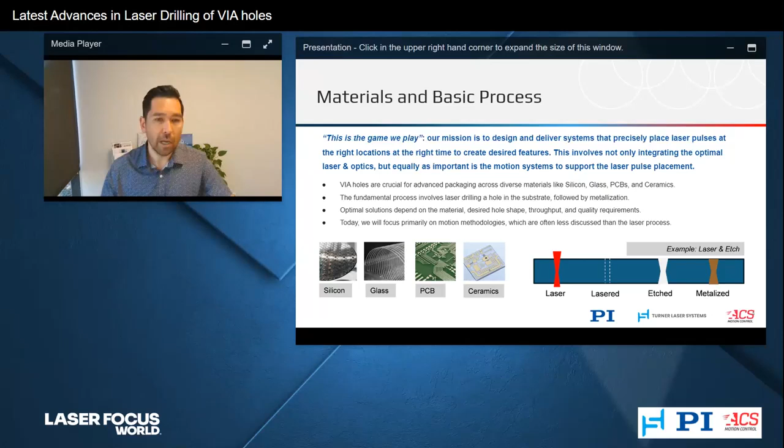I'm assuming a lot of people in this audience work with via holes and packaging in a variety of different industries, but essentially they're a central component to advanced packaging across a diverse range of materials and applications. We typically work with silicon, glass, PCBs, and ceramics. Fundamentally, it involves drilling holes in your substrates, followed by a metallization step, and there's a whole variety of different processes to achieve the hole drilling.

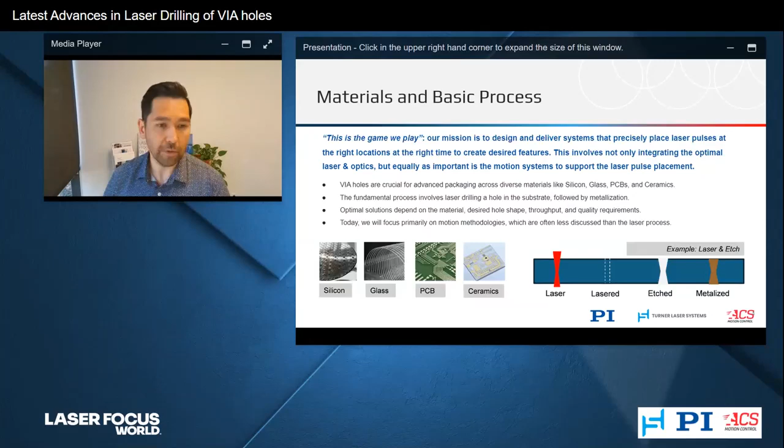We won't go through an entire presentation on laser processes, but as an example, on the bottom right is a laser and etch application in glass, which is commonly used, particularly in the semiconductor industry, and is generating a lot of interest. When I say laser and etch, I mean processing the material with a laser to create modified lasered features, followed by an etching step and a metallization to create the electrical interconnect. What is optimal really depends on the material you're working with, the desired hole shape, the hole size, the throughput you're looking to achieve, and the quality requirements. But today we're focusing primarily on the motion methodologies, which, compared to some laser processes often discussed in the laser industry, are a little less talked about. Hopefully this provides useful context if you're working with via holes.

Something right from the start I wanted to talk about, because it has a major impact on how you approach motion, is whether you're going to be running your processes with a galvo scanner, a galvo-based process, or a fixed optic.

A galvo scanner or galvo-based process is where we utilize a galvo scanner to direct the laser beam onto the workpiece. What we mean by this is the laser is scanning or moving over the workpiece while the workpiece is generally stationary. We'll talk about some more advanced methods a little later.

The pros of using galvo-based processes is you can have high throughput with these processes, in the sense that you can move very quickly from hole to hole. High jump time is meant to say high throughput jump time. But it's also a process enabler.

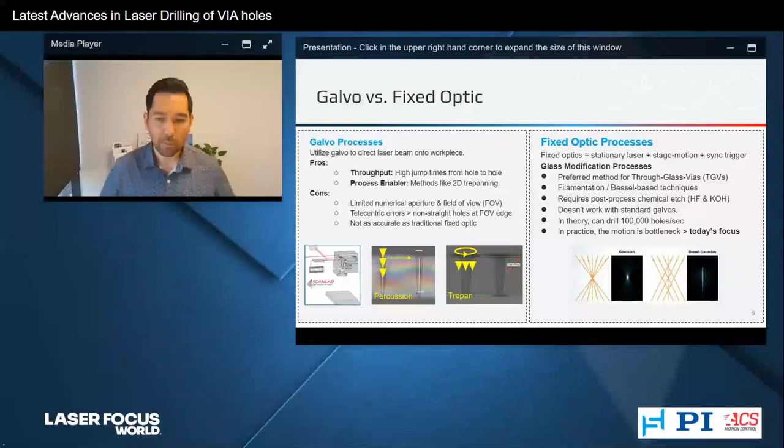Whilst in theory you can drill 100,000 holes per second, in practice the motion system is the bottleneck. That's going to be the core focus of our talk today, because there's a lot of promise with this technology, but the motion system needs a lot of work to enable it.

Some of the key requirements in terms of form factors: we work with wafers, we work with large panels, and we work with a variety of substrates of different sizes and thicknesses, ranging from 100 micron to millimeter typically. Taper angles of sort of a degree to 5 degrees is sort of common.

You can get close to zero taper if using the laser and etch method, or if you're doing ablation, you could use a 5-axis trepanning system. People sometimes use double-sided drilling for reduced taper, but that adds a lot of complexity to the motion and alignment.

From an accuracy standpoint, generally for the smaller holes, we're seeing about 2 to 5 micron accuracy requirement. Once you get to larger holes, 100 micron or so, you can probably live with something in the range of about 10 micron most of the time.

From a throughput standpoint, we generally see for applications in semiconductor where you've got large panels with millions of holes, the target there is to achieve thousands of holes per second, which can be very challenging.

And for other applications where you have fewer holes, you could usually have a much lower throughput.

In terms of laser and etch methods, generally there are two ways to approach this. You can have a single pulse per hole. It's the highest throughput—your motion is essentially focused on jumping between hole to hole. A single pulse creates that modification, but you have to aggressively etch, and it reduces the wafer thickness quite a lot.

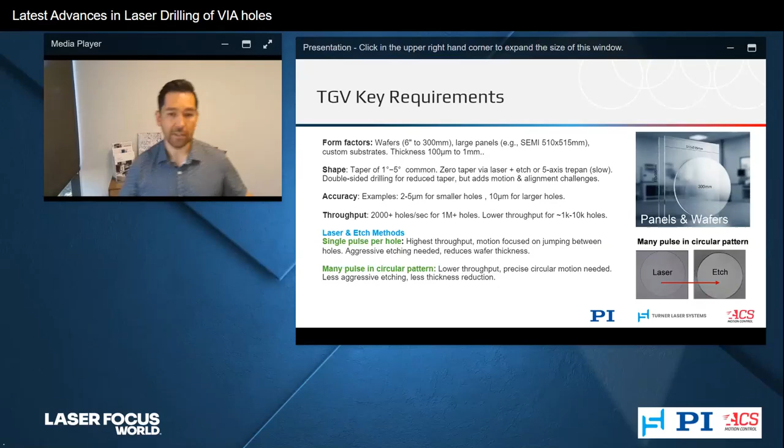Another method, which we'll be presenting today—just because it makes the motion a bit more interesting to present and provides some more education—is where you use many pulses to create the circular pattern. While this leads to lower throughput, because now you need many more pulses to create the hole, and it puts more demand on the circular motion, it does mean the aggressive etching can be reduced significantly, and you'll have less thickness reduction of the glass material.

Some other core challenges: the hole shape is important. We need to get good plating and electrical performance. We need very high uniformity from hole to hole—it's going to be important for yield.

As I mentioned, motion is the bottleneck for these ultra-fast laser-based processes. Acceleration and jerk are absolutely critical. A lot of times people talk about speed, but really it's acceleration and jerk that's going to be driving your throughput in these applications.

And if you're working with panels and larger workpieces, you've now got additional challenges of the inertia of such a system, as well as achieving high accuracy. You need to think about both the static accuracy as well as dynamic positioning errors, which we'll be showing and presenting in a bit.

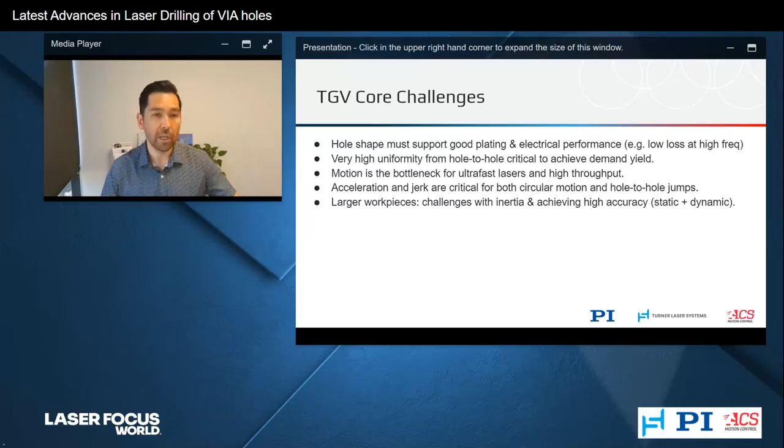Finally, just summarizing the application we'll be presenting a little later in this presentation: we're going to be doing 200 micron hole drilling in glass, and we've chosen a pitch of 2 millimeters. It's a uniform pitch—we chose this diameter and pitch just to make a really simple baseline, and our goal is to show you what it looks like as you use different algorithms or different stage setups.

So this is pretty simple. The lessons we're sharing here will apply to smaller or non-uniform pitches or hole diameters as well. Here we're using a femtosecond laser with Bessel optics, and these will result in very clean, straight, and damage-free holes.

Relevant if you're working in these industries: semi, medical device, telecom, defense, microfluidics. The motion challenges here are if you have incorrect hardware controls or synchronization, you get major issues with precision, yield, and throughput. As a little sneak preview here, I'll pass off to my colleague Matt to speak to the stage architectures.

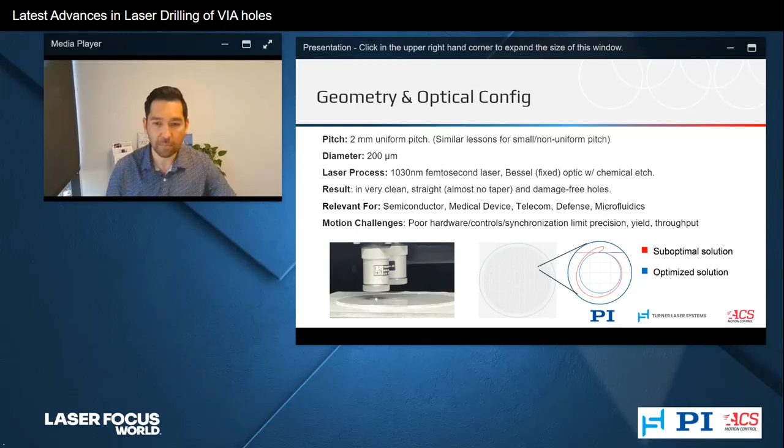Thank you, Mark. Mark has touched on a lot of key themes that we consider here at PI, especially in development of ultra-fast laser-based motion systems. So what I'd like to talk about specifically here is what Mark has been doing related to process. Specifically in terms of motion, I want to present on the stage architecture he's using, what we consider generally in mechanics and motion subassemblies that go into these kinds of advanced laser processing tools that Mark is manufacturing through Turner Laser Systems. I want to speak to our general philosophy and the work we do related to those.

So let me jump right into what we're calling stage architecture. There are some key characteristics that touch on those core concepts of ultra-fast processes and specifically what we do for those. I'm going to be presenting here on a V417 series of linear motor stages. As Mark mentioned, we need high dynamics, high dynamic responsiveness, and these systems and stages tend to be linear motor systems for those reasons.

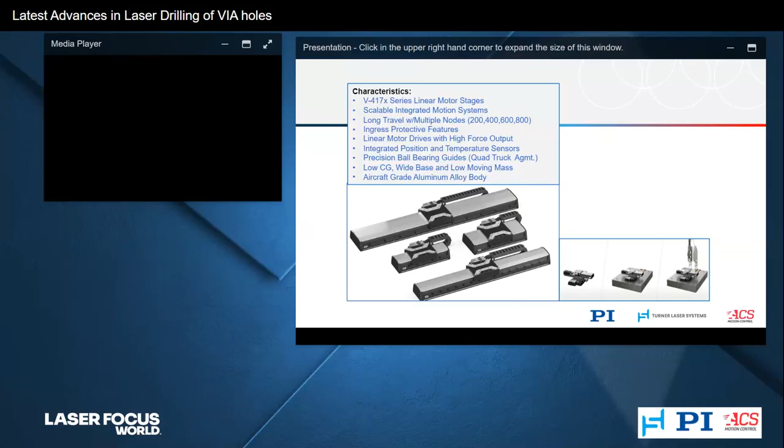So when we step through that, PI generally makes motion sub-assemblies, and this is part of an IMAS system series where we can provide scaled solutions, from an integrated XY base component stage with cable management for chucks and other things with service lines, to standard granite platforms, standard granite platforms with bridges, or out-of-crate complete motion sub-assemblies specific to the process.

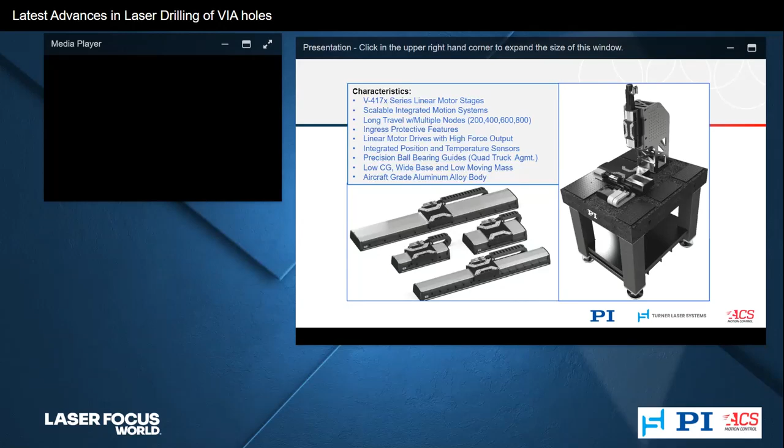And again, I'd like to point out that we are involved in a number of laser materials and additive manufacturing processes. This is one such system, but we have a number of architectures that we use. This one is specific to Mark's particular process that you're seeing here.

So as we step through, I want to talk a bit more about these dynamic characteristics, especially related to acceleration, jerk, and snap, the higher order time derivative of jerk. Generally, we want smooth, accurate dynamics without variable force as we guide. For that, we tend to lean into center drive linear motor kind of architectures.

That's what you're seeing in the V417 series and other such cases where you're dealing with femtosecond or picosecond kind of laser processes. So when we want that precise trajectory following that you'll be seeing in Mark's presentation and what Jason will speak to, we want a stiff, rigid, high dynamic structure that follows tight corners, much like we often hear in car analogies.

It's quite similar here. So we also want direct position measurement at the moving platform. In the language of what we do on the motion subsystems, we use linear encoders with the feedback topology specifically on the load, so there's no intermediate mechanical couplings that might otherwise introduce errors in position reporting. This is the architecture for these ultra-fast ablative or non-ablative processes.

And what we generally go to provide the best kind of results in terms of process that get validated at partners like Turner Laser Systems. So what does that look like practically?

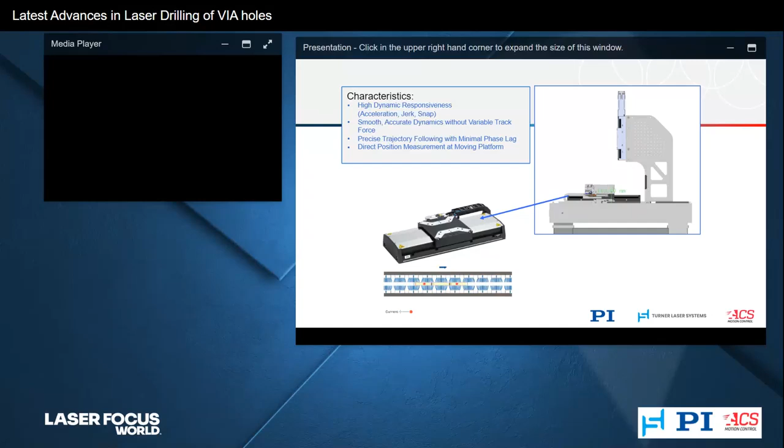We use ironless center drive, ironless linear motors. And what does that mean in terms of the way we design and architect these systems? Well, it's important to mention there are two critical factors to this, along with rigidity. One is the peak force output of the direct drive integrated motor. And so that motor in this case is a 3-phase ironless linear motor with a peak force output of 300 newtons. And we like to keep the moving mass low, but stiff. And so in this case, the V417 series has 2.8 kilograms of moving mass.

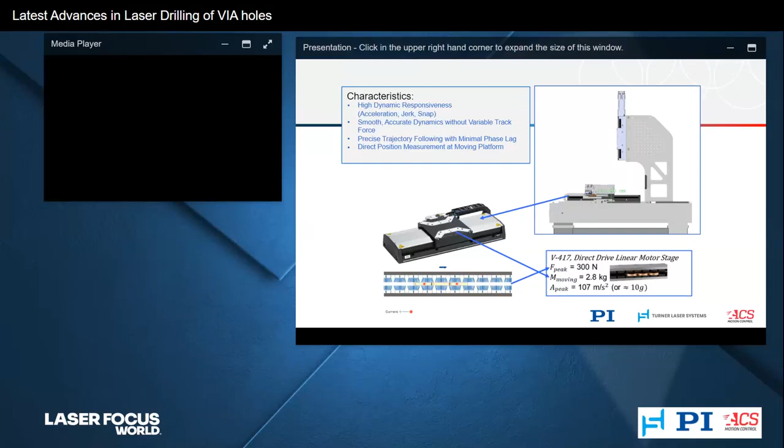So we also have to consider, though, that these stages get put into assemblies. And this is the case here in the process that Mark has been describing with the VIA hole drilling. And we have to consider that carefully also in the design of the motion architecture and expected architectures based on the component level stage assemblies.

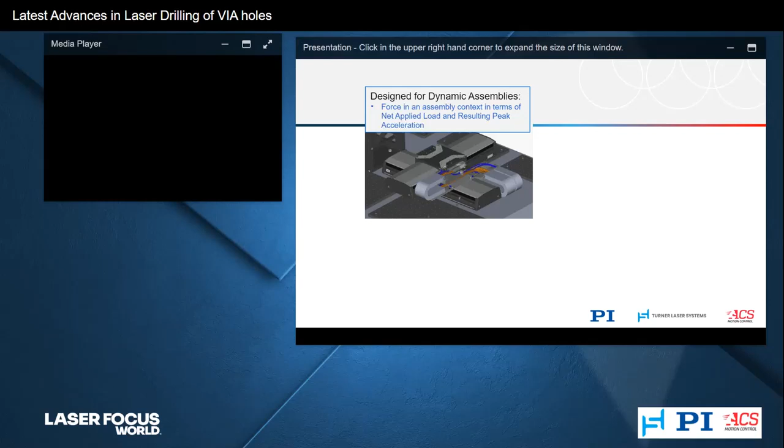And so when we look at that, we look at force in the assembly context, and what does that mean in net applied load and the resulting peak acceleration. So if we look at that, we have a mass buildup, is the way that I would describe it. And in motion, we often go to a moving mass description. In some cases, there's non-moving masses and they're not relevant for the application of motor force.

So in terms of this, you can see we have a carriage mass as a part of the V417 series. We have an upper axis mass that the lower axis is carrying on that carriage. And then we have an applied payload. It's not so uncommon that we carry aluminum chucks or other kind of substrates carried on vacuum chucks or holders of aluminum construction. Typically in ultra-fast laser processes, the substrates aren't terribly heavy. So in this case, let's presume kind of a typical load of 5 kilograms, chucking, applied load, etc.

And we calculate that force, and you can see that the peak force in terms of the stage is still 300 newtons on the lower axis, and with the full assembly weight, we can still move about 2 G acceleration in this kind of scenario.

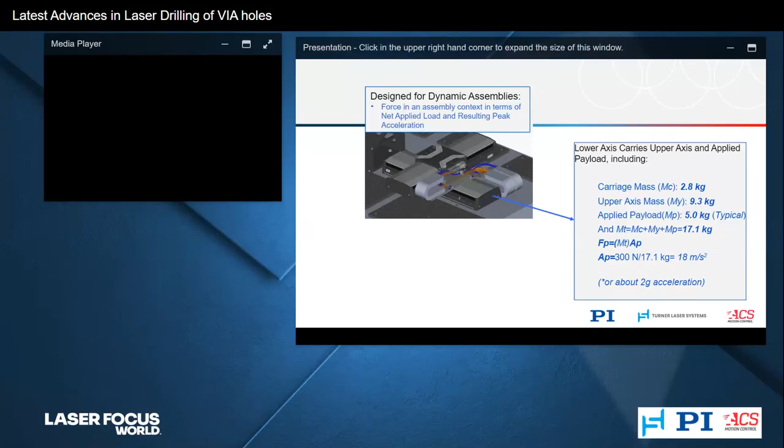So this is kind of to the point of purpose-driven design, that we want something that's wide, low base, low CG, low profile, but also stiff and lightweight. So when you make assemblies, you don't suffer inertial effects when you're trying to run tight corners. So this is all on the thoughtful design of the way that this works. And the center drive does that as well, where your center drive doesn't introduce torque moments or lateral kind of moments that, again, produce negative effects in terms of path following.

So now to step finally into another aspect, or the secondary aspect that's core to the design of laser materials processing stages and motion systems, we consider ingress protection. And most of these ablative processes are debris generating processes otherwise. You want to be careful to make sure that you have a sealed construction stage.

You want hard covers and side seals. You want passive ingress protection through the side seals, and you want, in our case, active ingress protection with an air purging system. So this generally, the air purging system provides two benefits. It provides the benefit of you prevent debris ingress into the interior body of the stage that could be contaminating or otherwise lifetime limiting. And secondary, with an air purge, you have constant airflow so you can prevent heat buildup.

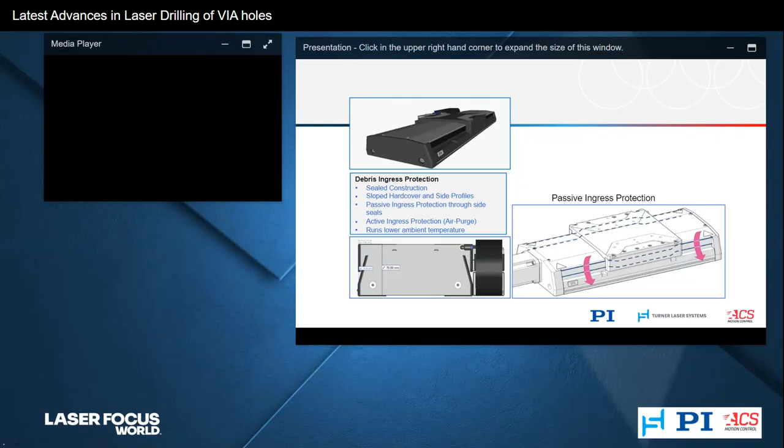And the slope construction keeps it channeled away from the body of the stage. And then we have active ingress protection. You can see these blue lines showing the airflow being tunneled with a positive pressure air purge into the interior body of the stage and out to the external environment, so you don't allow debris to contaminate the stage internals.

So when we look at these motion system subassemblies with these features that I described, that you're seeing the process results from, they all get backed against high performance motion controls and drives. That's a very important aspect to a successful process, along with the motion subassembly, stage architecture, and component level design details. And so to speak to that, I'll be passing to my colleague, Jason Gorgas.

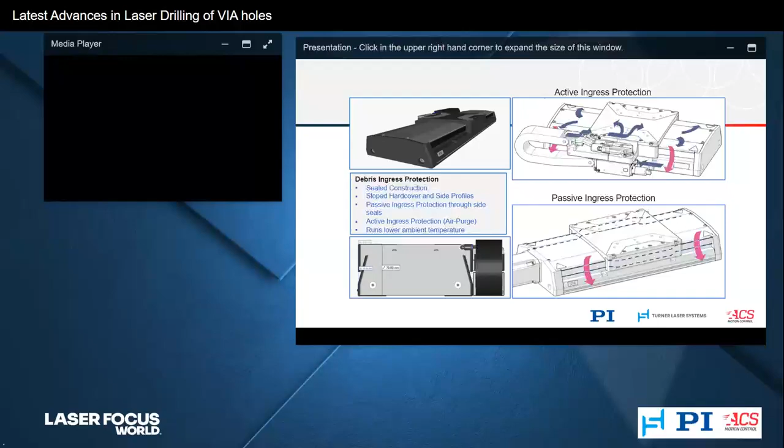All right, thank you, Matt. So yes, I'll be speaking today a bit more in detail on the motion controls, or the control system, namely the motion controller and the servo drives, the motor drives, which are driving the precision stages that Matt just explained. I'll be talking about a few aspects of the control system that are critical for ensuring the performance and optimizing the throughput and accuracy that we present in this webinar.

First, I'll talk about a few points on profile generation. This is the process of actually commanding the motion, and there are some nuances associated with that, and different approaches to handling it. In ACS motion controllers, the standard or default way of doing contoured profile generation, coordinated motion profiles for multi-axes, is referred to as segmented motion, which effectively consists of a path with line and arc segments. This is common in laser processing applications, additive manufacturing applications, where you have at least two primary axes and can have additional dependent motion axes.

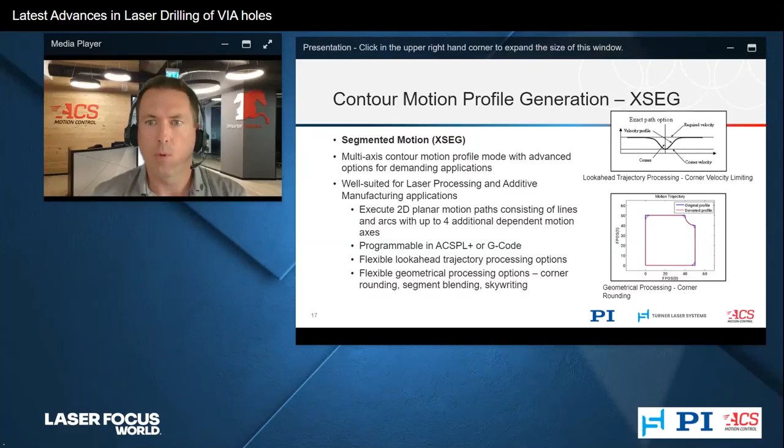So this is one paradigm of profile generation that I'm introducing here, and is appropriate for fixed optic via hole drilling, where it's primarily just lines and arc segments or circles representing a hole. Next, I'll introduce a more advanced version of contour motion profile generation that's applicable for generic profile applications, something which we at ACS call smooth path.

This is a mode which generates the profile from... looks like my slide switched there. Okay, so the smooth path algorithm is - there we go. The smooth path algorithm is taking a series of points and doing an interpolation on those points. And for arbitrary features, the example shown on the slide here is taking the A from our ACS motion control logo, which has many fine features, and interpolation between those features is critical.

So an advanced interpolation mode can really enhance the throughput compared with a traditional approach of doing line segments and small rounding at the intersections of those line segments. Another benefit to this type of approach is that you maintain a constant process speed throughout the entire path, which can be beneficial for a lot of applications.

This slide is showing here on the top a signals versus time plot of XY motion doing this A, in the upper plot showing it with a standard line and arc segment based approach, and in the lower plot showing smooth path interpolation based algorithm. You can see a significant improvement in the throughput, the duration of the process, but also the lower signals, the green and the beige, represent the following error of the axes, which are greatly minimized without any changes to the servo gains.

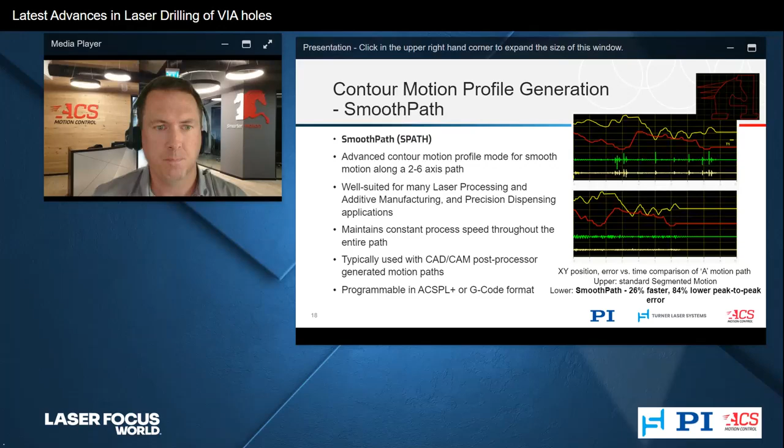All right, so the next slide shows a comparison that we've taken at ACS in our lab, looking at some different profile generation techniques for the same path. You can see that starting with the basic line and arc segment approach, and then applying corner processing or geometrical processing, or a combination of those, you can increase the accuracy, reducing effectively the position error during the process.

You also reduce the time. So that XSeg, or segmented motion hybrid approach, shows here a balance of throughput and accuracy, with the best accuracy or minimal following error during motion that we see from these settings. And then in the end, you see the smooth path configuration, where the throughput is increased significantly, the profile time is reduced significantly from that interpolation approach. So that's a balanced approach that's more favoring throughput.

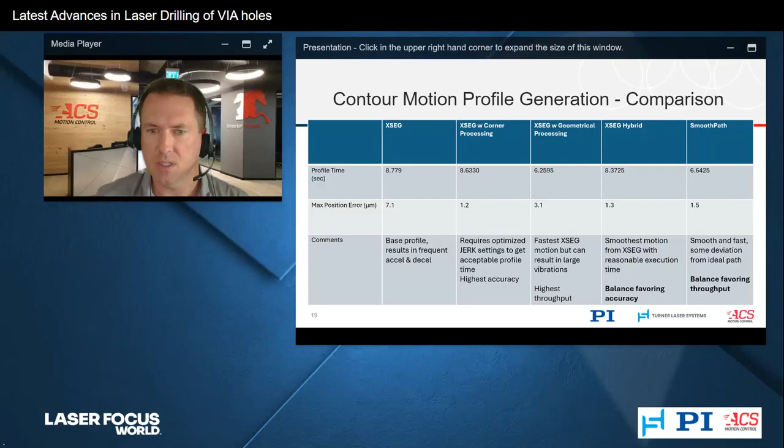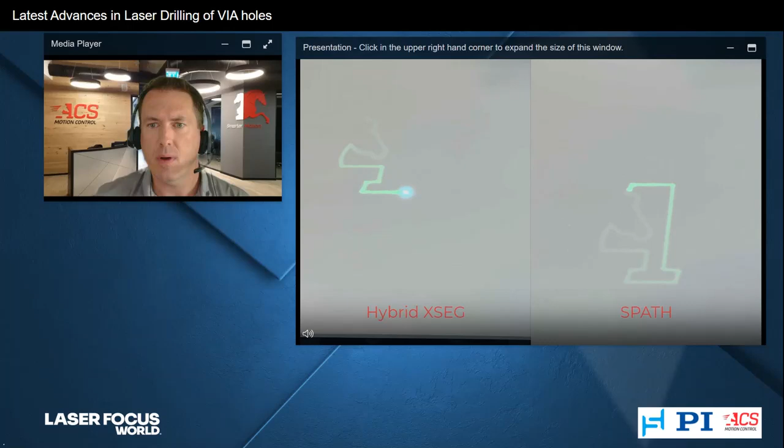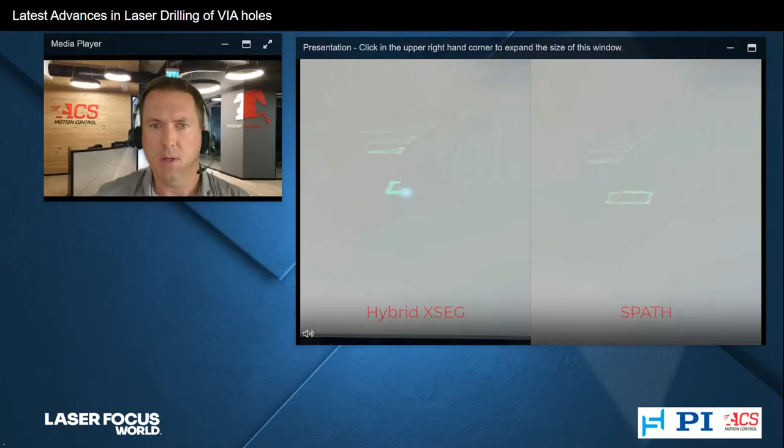The next slide here, I have a short video just showing the comparison of the two methods. I'll play that faster. All right, so motion profile generation is one important element.

Next, I'm going to briefly move on to the control algorithms themselves. So it's one thing to command the motion in the optimal way. It's another thing to then actually follow the commanded motion in the best way with the minimal error possible. So here I present just a few advanced servo control algorithms.

This one we call ServoBoost at ACS. It's an advanced proprietary control algorithm based on feedback and feed-forward control techniques, but it's doing a more sophisticated control algorithm set than PID or PID feed-forward control. And effectively, this algorithm is identifying disturbances and compensating for those in real time.

And one example of classical disturbance is in a stacked motion system, the motion on one stage axis could induce some disturbance in the other axis. Could be due to non-orthogonality or some coupling between the mechanical axes. So this type of an algorithm really helps to reduce the following error, effectively increase the servo bandwidth and the disturbance rejection of the servo control loop.

And on the right side of this slide, you see an example data set taken from a move and settle motion profile, where the blue represents the standard error with PID feed-forward control approach. The red represents the reduced following error by applying this ServoBoost advanced algorithm.

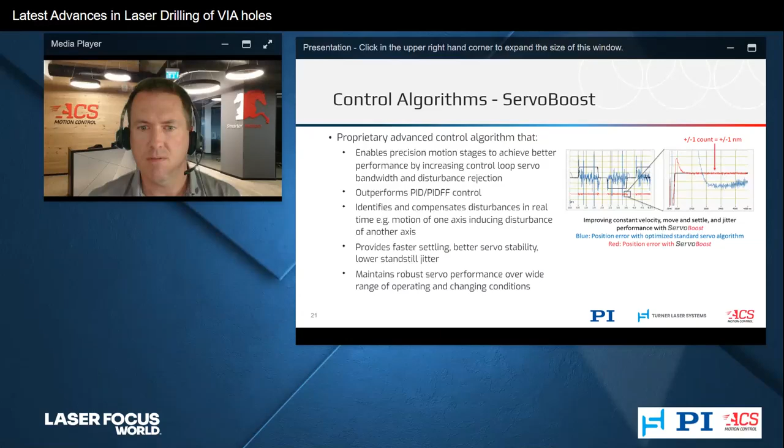The next type of algorithm I want to present here briefly is a learning-based control algorithm. So the field of learning-based control algorithms has really started to scale and grow in industrial precision motion control applications. We at ACS introduced the first commercial learning-based control algorithm a few years ago, and that's something that we continue to develop and extend its capabilities.

What I show here is one version of learning-based control in which the algorithm actually learns over consecutive recipes in an application. The recipe could be something as simple as a point-to-point motion. It could be a circular motion. It could be a whole series of motions, for example, all the holes to drill in a hole drilling application.

And an advantage of learning-based control over classical feedback and feed-forward based control algorithms, even advantageous over the previous algorithm I just described, is that learning-based control is non-causal. Learning-based control gives the ability to predict and compensate for disturbances in the motion system before they even occur. So it is generally true that with learning-based control algorithms, you have the potential to improve the performance at a level beyond what's achievable with classical feedback-based control algorithms.

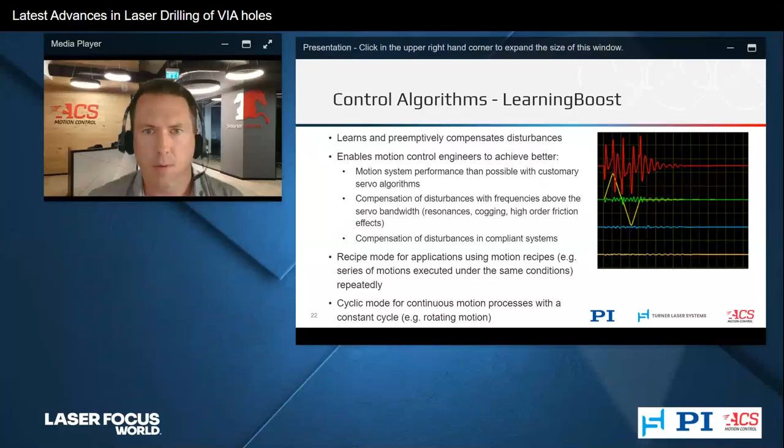All right, so the next slide I'm showing here, I already spoke about profile generation, about servo control, and now I'm getting to a third key element of the control system, which is the synchronization of the motion to the laser process itself. So even if the profile generation has been optimized and the servo control has been optimized, it's still critical that the triggering of the laser or the control of the laser in synchronization to the motion is very precise. So one way of addressing that challenge is to use a dedicated module or dedicated piece of hardware to trigger the laser in full synchronization with the motion.

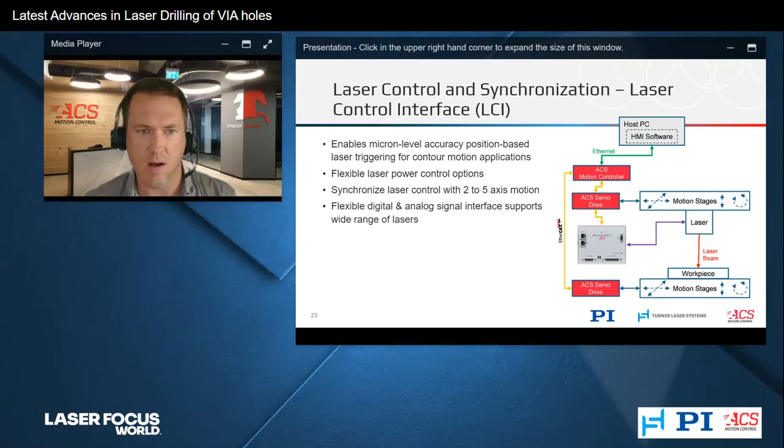We at ACS do offer such types of products. The one we show here is called LCI, Laser Control Interface. And as you can see on the architecture diagram on the right, it's effectively a node in an industrial Ethernet network comprised of the motion controller, the servo drives, and this node is an add-on option to the control system, and it's operating in full synchronization with the motion controller that generates the profile, the servo drives that execute the control algorithms, and the laser control interface, which interfaces to the laser with digital and analog control signals.

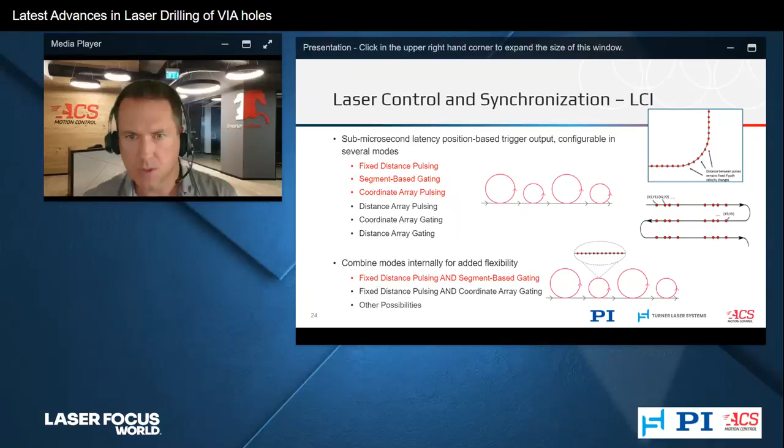Okay, so I will now hand it back over to Mark to discuss some of the process results for the use case here.

Great, thanks Jason. And before I jump into the results, I want to give a big thank you to Kevin Chan at the ACS Motion team, and also Dr. George Wilkes from the Turner Laser Systems Applications team, who acquired the results we'll be presenting in the next couple of slides.

So putting together all the components that Matt and Jason have just talked about, that's what we do as a machine builder and integrator. This is the only salesy slide I have in the presentation, but if you're interested in machines that do these types of processes with these types of motion solutions, we offer the TLS Kanga, which is the platform we utilize for these TGV processes and other types of laser platforms.

So what we've done here today is integrate the stages that Matt presented, after evaluating the dynamic requirements for this application, with the controls that Jason just mentioned, integrating that into a single system, including the advanced algorithms that Jason was talking about as well.

Software is also something that's often not talked about a lot. Software is really critical, and I'll give you some examples where software makes a difference in a little bit. For us, software does the CAD/CAM path planning and also provides the ability to see through a motion tracking visualizer, which is really important when you're dialing things in and getting it calibrated.

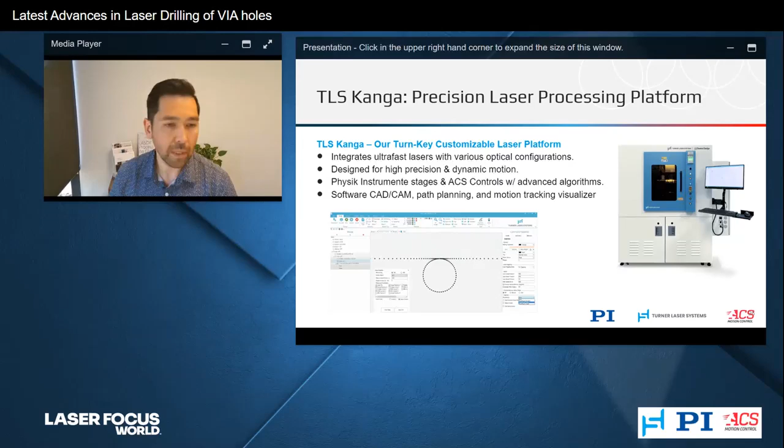Jumping into the results we achieved bringing all these systems together, we started off using a different machine in our facility called generic stages. This was a very well-tuned and calibrated micro machining system, but it was not designed for through glass vias. I wanted to show this as a baseline just to give you an example — if you've built your own system, or have one in your facility used for these processes, and haven't thought about a lot of the details that Matt and Jason just presented, this could be something you might start to see in your facility.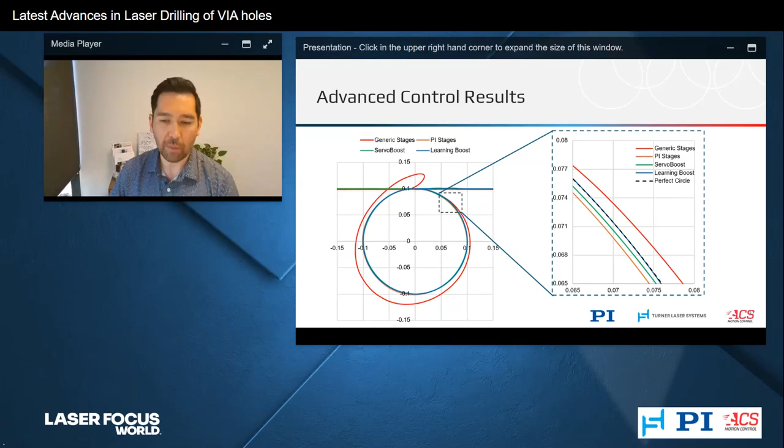So this gives you a nice visual representation as you apply all these different elements, how they make, at least on a qualitative level, improvements to the overall via hole formation.

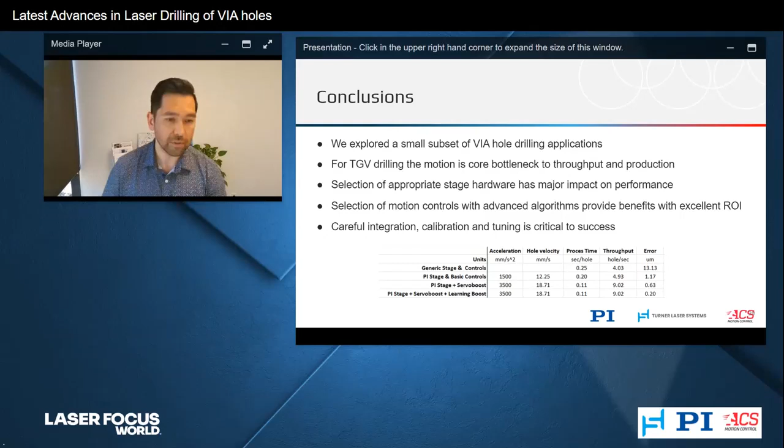Besides having the right components, you need to work with someone, either internally within your team or with a partner, who knows how to carefully integrate these components together. It does take a long time to do the calibrations, the assembly, and the tuning, and they are absolutely critical to the success.

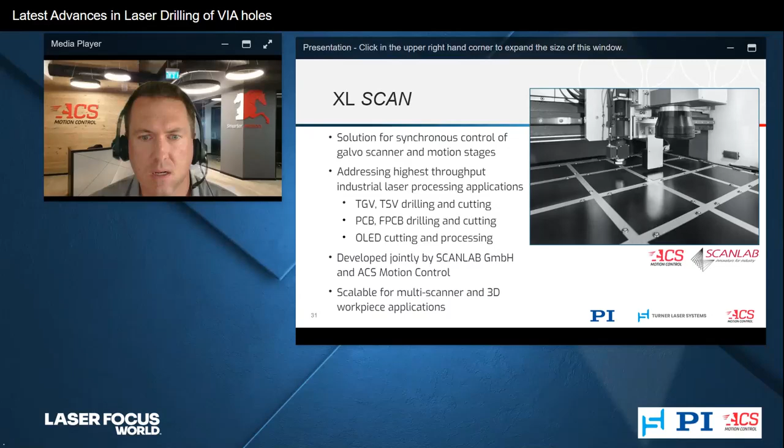So that's just a brief teaser on XL Scan, which can improve the throughput of drilling applications significantly. Here's a slide which shows the architecture of that control system, comprised of ACS controller and servo drive products, SCANLAB RTC6 and excelliSCAN or intelliSCAN scanners. These are fully synchronized between the two industrial digital networks.

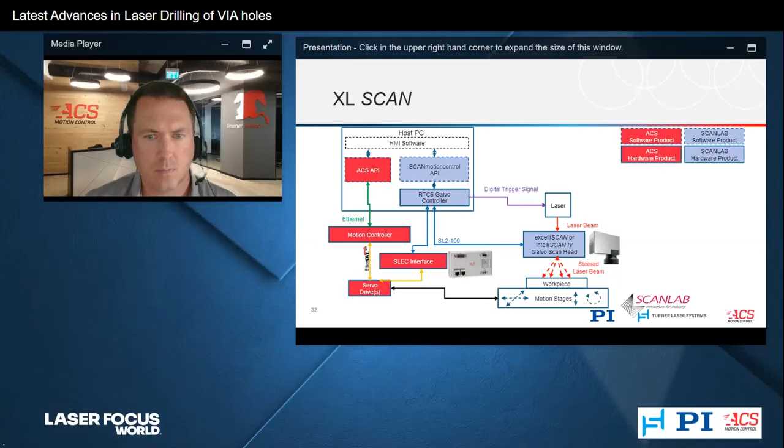And is suitable for use with a wide range of precision motion stages and lasers. So that's XL Scan. The next point to highlight is that error compensation for dynamic errors in the stage, mechanical error in the stage, is also critical and can significantly increase the accuracy.

At ACS, we offer error mapping functions and capability built into the controller. You can do 1D, 2D, or even extend to 3D mapping use cases, mechanically. It's also possible to introduce other variables into the mapping functions, such as temperature, doing a thermal compensation where the mapping actually adjusts based on the environmental temperature.

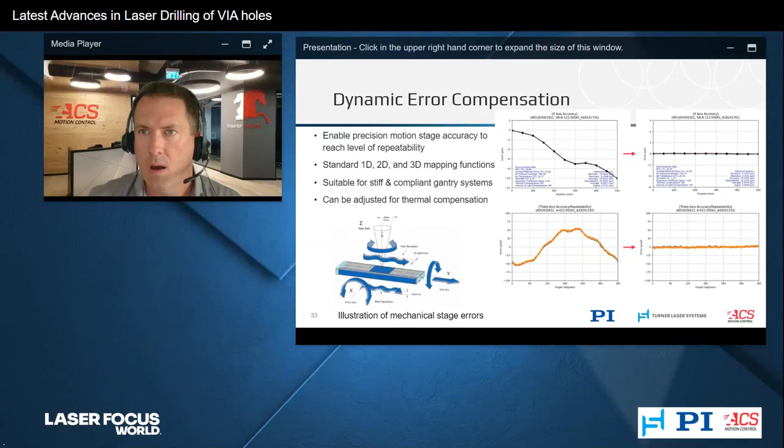All right, so with that, I will actually give it back to you, Mark, to speak a little bit more to the application of that for a real world use case.

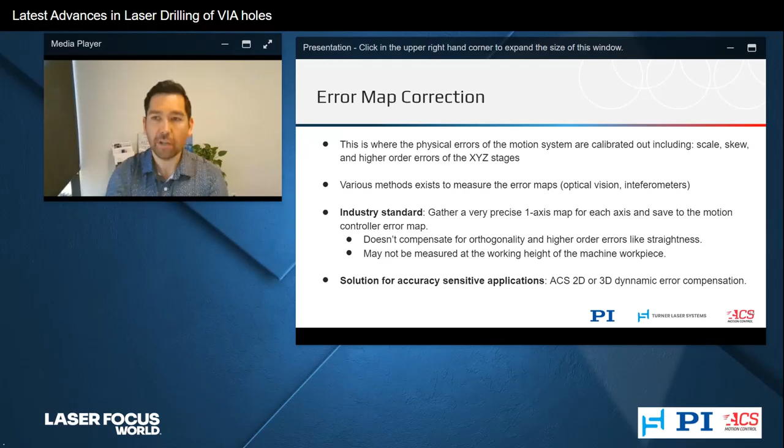Great, and I think someone asked in the questions, what are some of the other challenges that we typically face besides the motion? A big part of the challenge of getting process level accuracy, particularly for via holes where the hole positioning needs to be critical, one of the biggest challenges we have to do is calibrating these systems.

Something I wanted to mention is the error map correction is absolutely critical. This is where the physical errors of the motion system are calibrated out. This means scale, skew, and what Jason was talking about there.

We see a lot of the times in industry, interferometry is used to do sort of a one-axis map for each axis, and then combine them together into multi-axis or multiple one-axis maps. But this type of method doesn't compensate for orthogonality or any other higher order errors, like the straightness of one axis impacting the accuracy on the other axis.

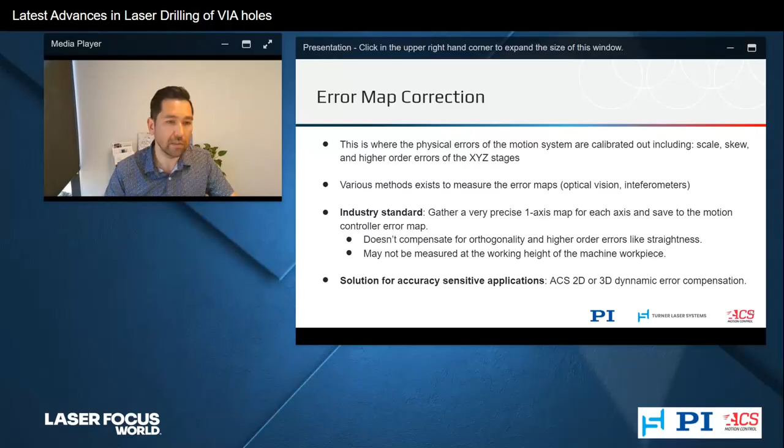So from a machine standpoint, or if you're drilling holes on a wafer, on a panel, that type of solution doesn't work very good. So for us, what we utilize is 2D or 3D dynamic error compensation algorithms that ACS provides. I just wanted to share a really quick case study of what that looks like.

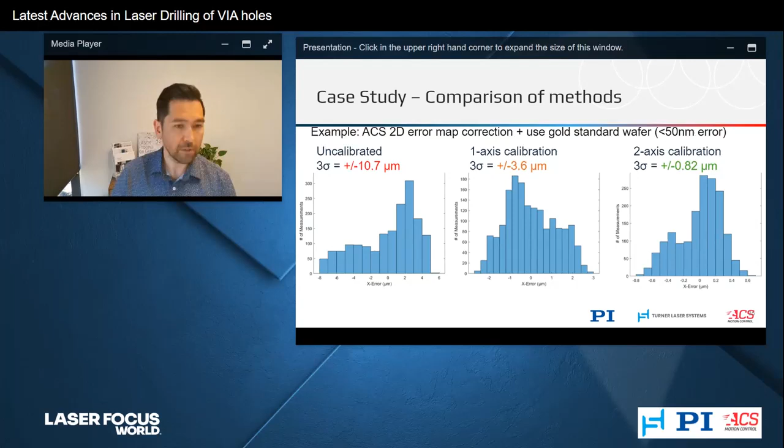And then I'll pass off to Matt to close us out.

Thank you, Mark. So one exciting area that's existed for PI for a while, with our background and expertise in piezo technology, is hybrid motion systems that combine these linear motor or other electric motor kind of motion subassemblies with piezo technology and sort of piezo integrated stages or positioners.

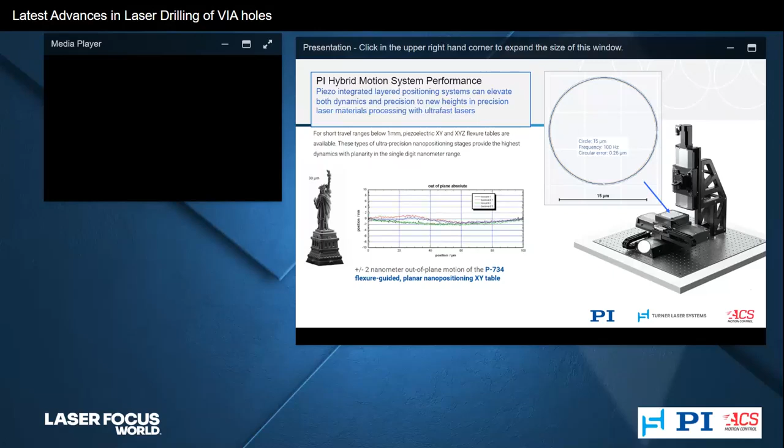We're doing that now. One exciting area where we're doing that happens in two-photon polymerization. You can see the Statue of Liberty, where you now have processes that can resolve down to sub-100 nanometer kind of feature sizes. And then you can embed or apply piezo stages in combination with motorized stages to get really fine following and high dynamics.

This is being done now, and you can see here in this graphic, in the context of via drilling, you can have your coarse positioning provided by the motorized stages, and then you can have really fine, ultra-high dynamic positioning through the piezo stages. That's what you're seeing in the lower right-hand corner, and you can see this nanometer level error and trajectory following when you apply piezo stages to hybrid motion control solutions.

So this is an exciting area where we're continuing to grow and apply. And as sort of dual experts in motorized positioning and piezo technology, it's really right along the core of what PI does. We're looking forward to seeing more of these solutions applied in systems used at Turner and beyond.

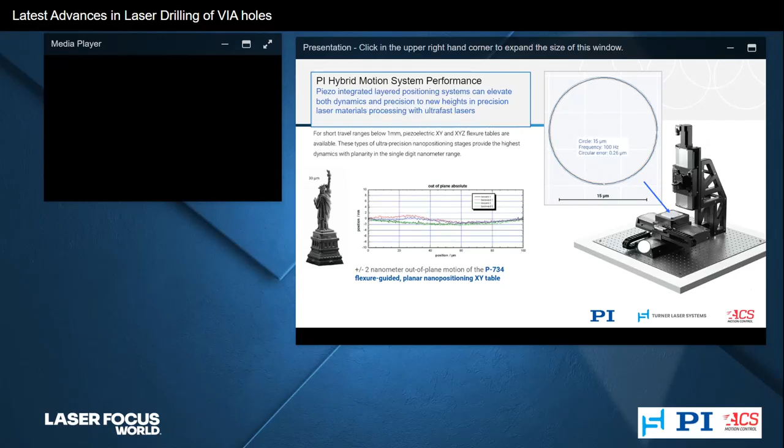Could you please provide some more general features of a laser for drilling, a power frequency, for example?

I can speak to this question as well. It's a little bit of a generic question, but assuming you're working with glass, we generally work with femtosecond or picosecond lasers. I often get asked how much power is needed, but it's usually actually more of a question of how much pulse energy is needed, and that will be determined by the thickness of the glass. For most common thicknesses we work with, generally hundreds of microjoules is needed.

You may be doing often a burst mode, so another feature you should be looking out for besides pulse energy should be bursting features. There's a whole spectrum of research going on about whether you should be using megahertz burst or gigahertz burst, and it varies a lot on the type of glass you're working with. So you'll be looking for ultra-fast lasers with burst capabilities, looking at pulse energy more than power. Power comes into play when you start thinking about repetition rate.

As we talked about here, generally you're motion limited. So very rarely are you using a 100-watt femtosecond laser to do these processes. In reality, we're often running these lasers at a few watts to maybe tens of watts if you're doing straight lines and moving really quickly.